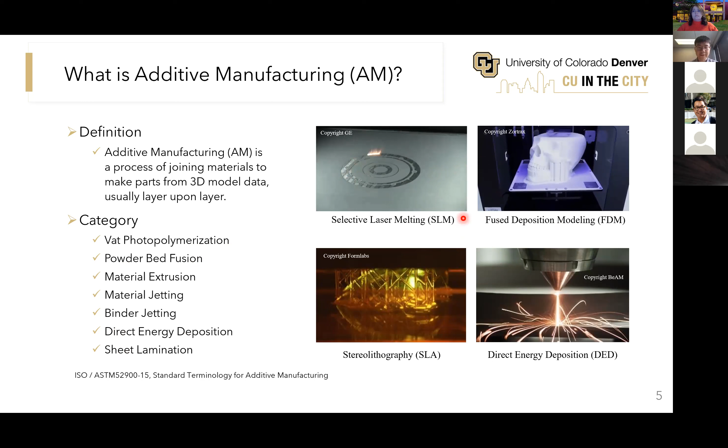So those are the most popular AM technologies. For sure, there are some others I don't have to introduce, but you can just watch on YouTube to see those technologies. Very easy. Okay, those are AM.

But what can AM bring us? Actually, there are a lot of capabilities of AM, and four of those are the most important ones. The first is called shape complexity. For shape complexity, it means that in AM we can make very complex parts, not just simple parts. We can make a very complex shape layer by layer, but for traditional manufacturing technology, we can only make standard or very simple shapes. For AM, we can make the complexity very high, which I will show you some examples of later.

The second is called hierarchical complexity, which means for AM we can make micro scale, meso scale, and macro scale. So in one part, we can have multiple scales, which means we can have hierarchical complexity.

For functional complexity, it means using AM we can make a part with different functions. For example, we can have mechanical function, fluid function, thermal function, or we can even have embedded electronics. So this means we can combine many functions in one part.

The last one is called material complexity. Usually for traditional manufacturing methods, we can only use one material, or we may use carbon fiber as a composite, using two materials. But for additive manufacturing, we can have a lot of material combinations, and we can call it digital materials, which means the material composition can be coded, and we can have functional graded materials. We can control the material distribution in each area, so we can have more material complexity for AM.

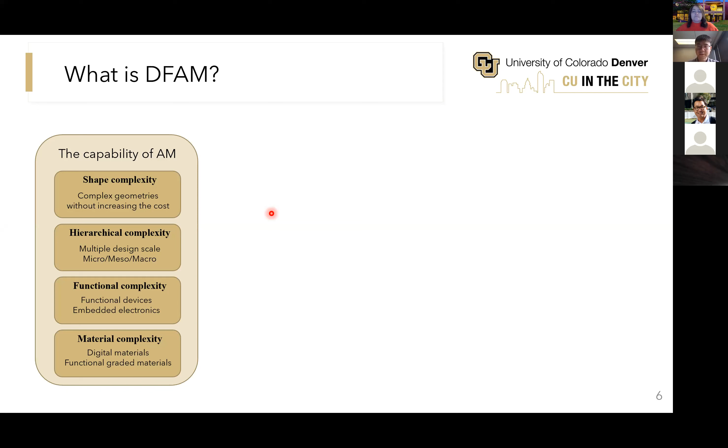After we know there are some capabilities of AM, we can have a product with many good functional performances, like mechanical performance with high stiffness or strength to weight ratio, high energy absorption rate, and good thermal properties like high heat transfer rate. We can also have biomedical applications, using biocompatible material and customization for biomedical purposes. We can also have meta materials, like negative Poisson's ratio or negative thermal expansion—unique properties that don't exist in common materials, but we can use meta materials to realize them.

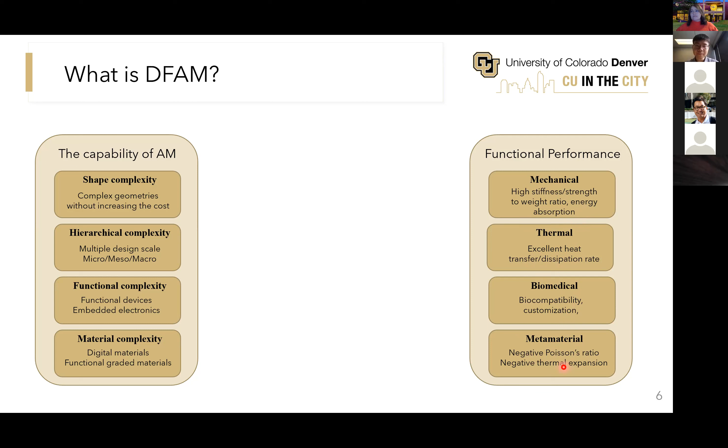So we have resources, we have our needs. How can we utilize the resources for our needs? We need a bridge—that bridge is design for additive manufacturing. That's what we're going to talk about today. Design for additive manufacturing means we have to consider the capabilities of AM and how we can use those capabilities to achieve functional performance.

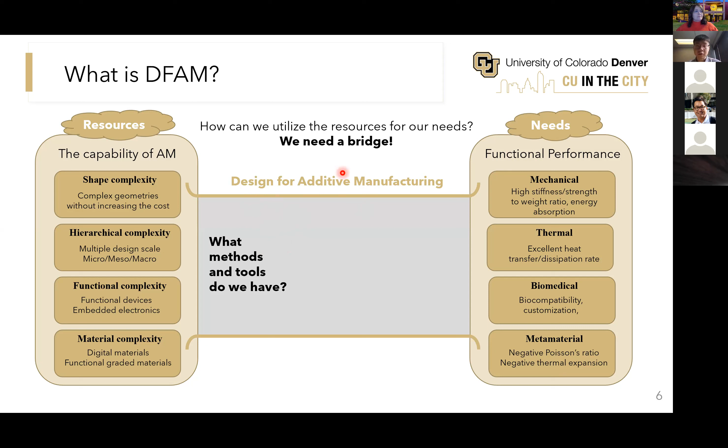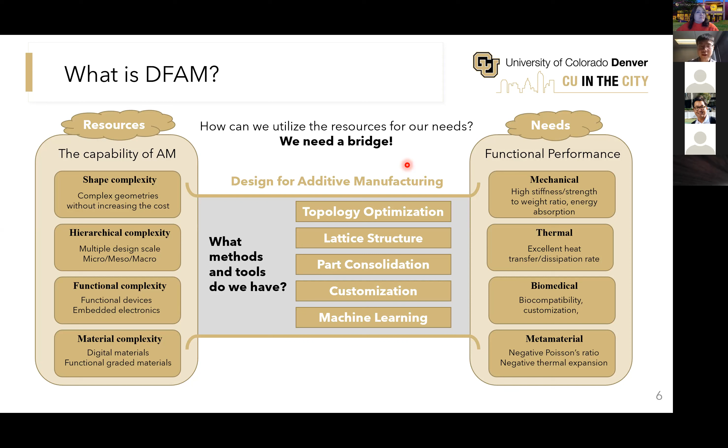For design for additive manufacturing, we have a lot of methods. What I'm going to cover today will include topology optimization, lattice structure, part consolidation, customization, and machine learning. There are many techniques in design for additive manufacturing, and those are the topics we're going to cover today.

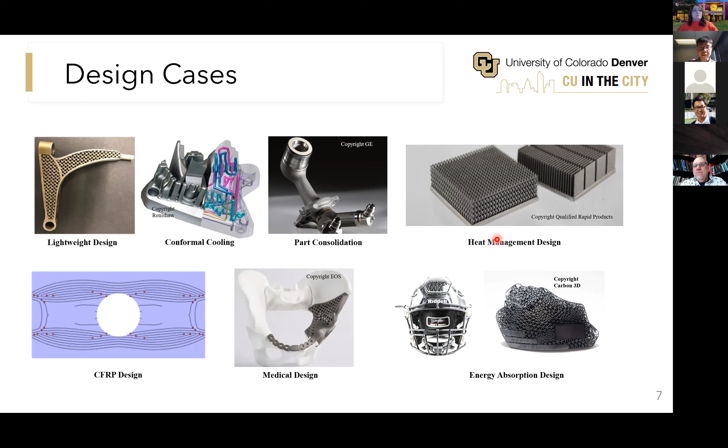So those are some design cases by AM, and I'm going to talk about methods to design those products today. If you're interested, you can also talk with me later. Now I'm going to move on to the second part—how to seize those opportunities. I will introduce the methods we use in design for additive manufacturing.

The first, and I think the most important one, is called topology optimization. This technology has been used a lot in additive manufacturing. Before I talk about topology optimization, I want to introduce structural optimization.

Before AM was developed, people mainly focused on size optimization and shape optimization for structures. Size optimization is easy to understand—we have the size of a plate or bar, and we just optimize the size. Shape optimization is more complex; we may optimize the shape of the plate or the bar.

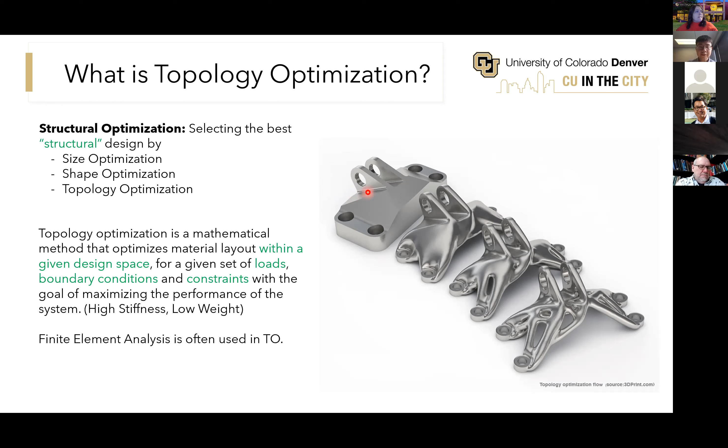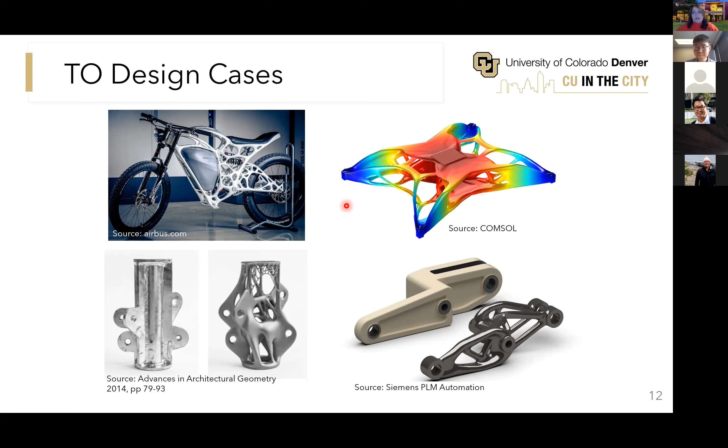Okay, and we have one more question. What are some examples of objective functions for topology optimization?

Can one use multiple criteria for optimization?

Good question. For topology optimization, usually the objective is to increase the stiffness. But we can have multiple objectives, which is called a multi-objective problem. Usually we use some weight ratio between each objective and add them together to have a total objective. Or we can have a coupled problem, like topology optimization coupled with fluid dynamics, and that will be more complex.

Like we have one model for mechanical and one model for fluids, and we have to interact with each other. So it will be a multidisciplinary coupled optimization problem. We can have an objective in one model and an objective in another model, and we have to optimize with a compromise between each other. We can have that, but the system will be more complex.

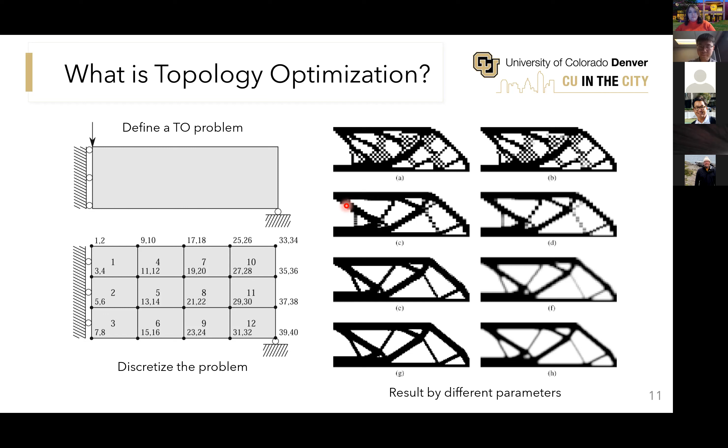Let's keep working on the next topic I'm going to introduce, which is lattice structure. Actually this is what I'm most familiar with, because lattice structure is my whole PhD research. So first, let me introduce what lattice structure is. It is a type of cellular structure with interconnected struts and nodes in a three-dimensional space. It is called lattice structure.

This word is from material science. In material science, lattice structure refers to a very micro scale or even nano scale. But for mechanical, we call lattice structure something in a meso scale or macro scale. So this is our lattice structure in mechanical.

For lattice structure, this idea is not new, but as I mentioned for topology optimization, as you can see, those structures are very complex. So only with AM can we make those parts. That's why lattice structure also got popular after AM was developed.

So lattice structure can be categorized by its periodicity or its homogeneity. We have periodic lattice, quasi-periodic lattice, or non-periodic lattice structure by its periodicity. And we can also have homogeneous lattice or heterogeneous lattice. The difference is that in the homogeneous lattice structure, the material distribution is uniform - all the strut thicknesses are the same.

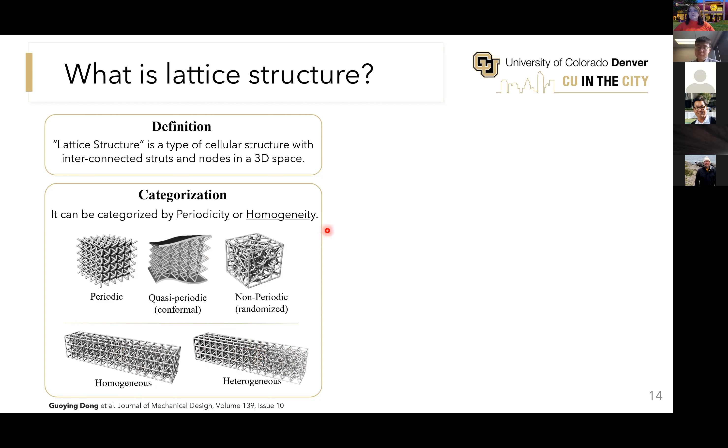So why is lattice structure popular? It is because it has many unique properties or very good mechanical properties, like high stiffness to weight ratio. It can also have a high surface to volume ratio for heat transfer or heat dissipation. We can also use lattice structure for high energy absorption because we have so many empty areas, the voids inside the structure, so it can absorb energy.

And we can also use lattice structure to make metamaterial. As you can see with this material, when we compress it, it will shrink on the other side, right? So we can call it a negative Poisson's ratio structure. Usually if we just compress something, it will expand in the lateral direction, but for this one, it will shrink in the lateral direction. So that is what we can use lattice structure for.

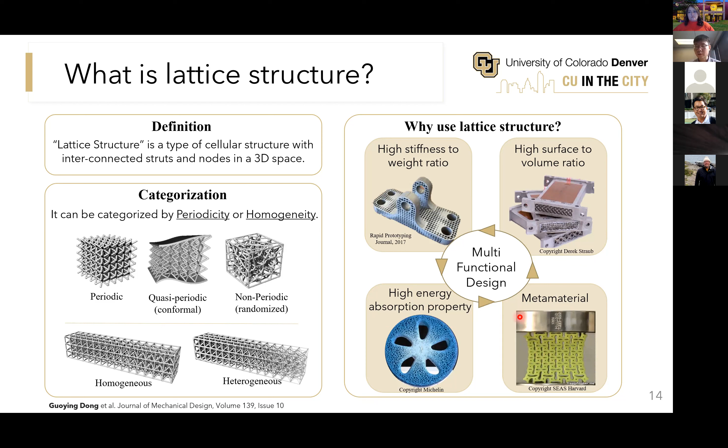So lattice structure is usually used to design lightweight structure, which requires its high stiffness to weight ratio property, like what we talked about with topology optimization before.

After we topology optimize one part, we may have some empty regions. For additive manufacturing, manufacturing this part is a little bit hard because we need some support structure here, and it's very hard to remove. So one idea is that we can put lattice structure in those regions, and then optimize the lattice structure together with this part. Then this is the part we need, and we don't need to remove the lattice structure - we can manufacture this part as a whole in the AM process. So this is lattice structure for lightweight design.

To optimize the lattice structure, usually we have two methods. The first one is called the BESO Method. In this method, we just model the lattice structure as a beam element. For each beam element, it has a thickness. So what we do is move the material from low stress struts - for those blue struts, they are low stress - and we move the material to the red struts where the stress is high.

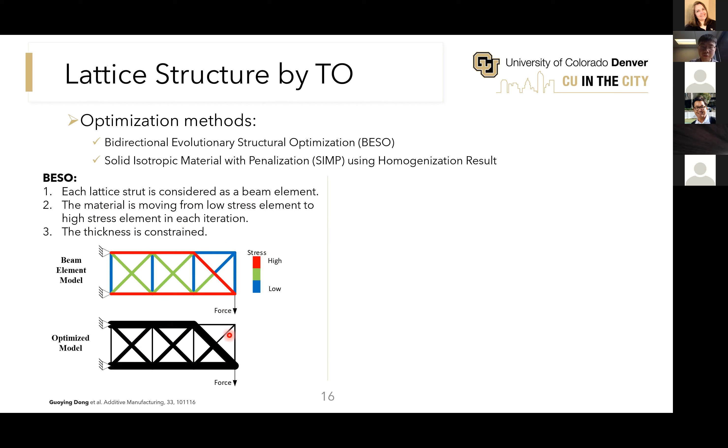So after several iterations, we can have a result like this. For those high stress struts, we have high thickness, which means we have more material here, and we have less material for those low stress struts. This is how the BESO method works.

Actually, the theory behind these two is more complex than what you saw here, but this is a basic introduction. If you are interested, you can go back and find some papers related to those methods.

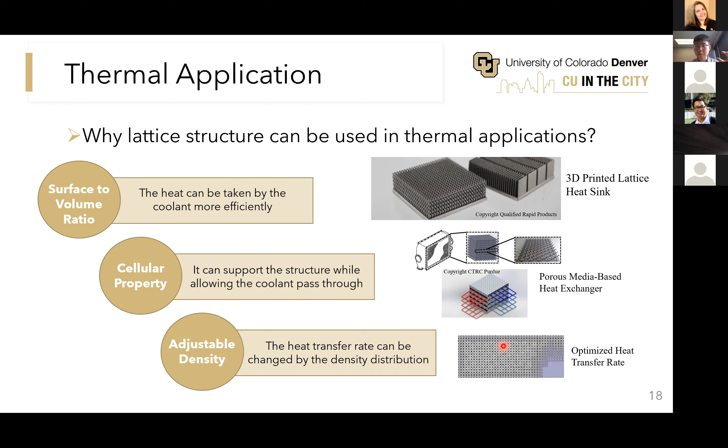Professor, one more question. Well, I can't promise that'll be the last one, but there's another one. What are the limitations of additive manufacturing? Limitations? Okay. Yeah, actually, there are a lot of limitations. Like first, for additive manufacturing, as I mentioned, for most of the process, it's very hard to make a big part. So you have to consider the size of the part.

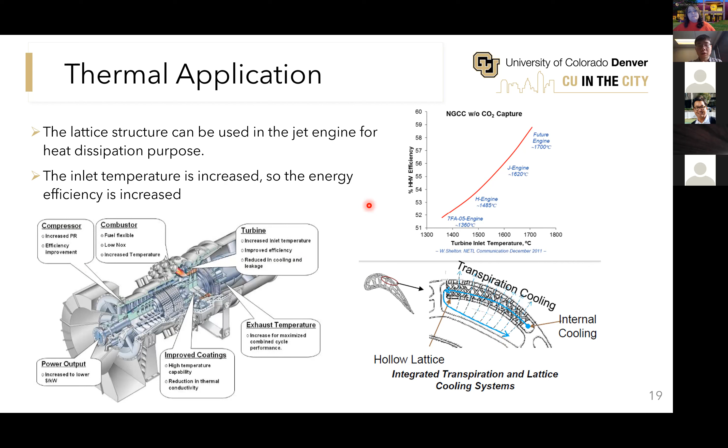And also for additive manufacturing, sometimes it needs support structure. Like if we want to manufacture this part without lattice structure, we need support inside. And we need post-processing. That is a very big limitation. Like for most additive manufacturing, for metallic parts, the surface roughness is very high. We cannot have a very good surface finishing. So usually we need to do post-processing by some machine so that we can polish it to have a very good part quality.

And also for additive manufacturing, there might be some material limitation. Like for the selective laser melting process, we can make stainless steel, we can make titanium, we can make aluminum, but not all. We only have some like 10 or 12 types of material that are used in the process. It is because people have to figure out the property of the material, and then they can have a very good process parameter for that material. So it takes time to develop. So still, there are some material limitations there.

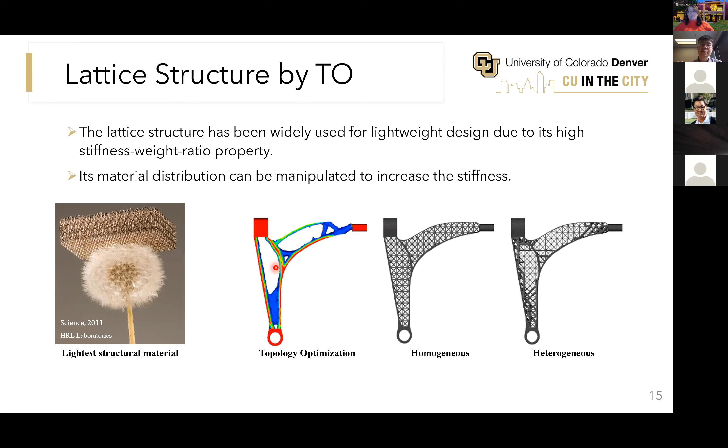Yeah, that's what I can think about now, but I'm sure there will be more limitations. So after you know better about additive manufacturing, you will know the limitations, and you can just consider those limitations in the design. That is also very important.

Okay, so after I introduce the thermal application, I'm going to introduce the energy absorption of lattice structure. So why can lattice structure be used for energy absorption? The first reason is that there are some little struts there. So when the strut breaks or when it buckles, it can reduce the maximum load here. So it won't have a surge load if we have impact. Here, as you can see, this threshold is related to injury. So if this pressure load is very high, then people may get injured. But lattice structure can reduce this peak value to make it lower than the injury threshold.

And the second reason is that the lattice structure's stress-strain curve usually has a plateau region. This is an ideal energy absorption material. It has a very long plateau stress region, so it can absorb energy. Usually we calculate the energy absorption by calculating the area under this stress-strain curve. So if this is long, then we can have more energy absorption. This is a real stress-strain curve of a lattice structure. As you can see, even though it is not purely flat, we still have a plateau region in this area. So those areas are the energy we have absorbed.

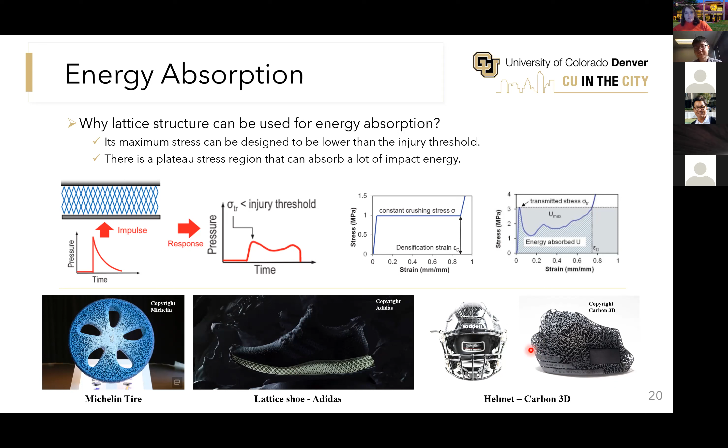Lattice structure has been used to make tires, to make the midsole of the shoe, and it can also be used to make helmets to absorb energy. And lattice structure has been used for shoes. That is a very successful production by AM. Adidas has used the lattice structure to design this shoe midsole. And why? Because first, as I mentioned, it has energy absorption, and it has air permeability so that the air can go through the lattice structure. It is lightweight. Usually for running shoes, we need lightweight, and it looks fashionable, so they can sell it at a very good price.

And this is some technology that is used to make the shoe sole, which is by Carbon 3D. For their 3D printer, the biggest advantage is that it can print very fast. They have a TED talk online from 2015. They can print something like this truss maybe in several minutes. They can just pull this truss out from their tank. This is really fast. That is good for production, for mass production, for consumer goods.

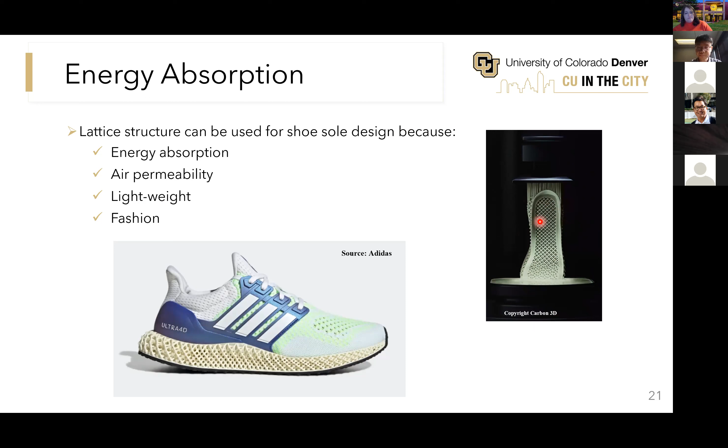Actually, in my lab, we can also design the truss with lattice structure. We developed our own code that can generate lattice structures. So usually to design such a lattice structure, we need a design space. This is our design space, and we take the top and bottom surfaces out, and we use these two surfaces as guide surfaces, and we can generate lattice between these two surfaces. Then we can have a lattice truss.

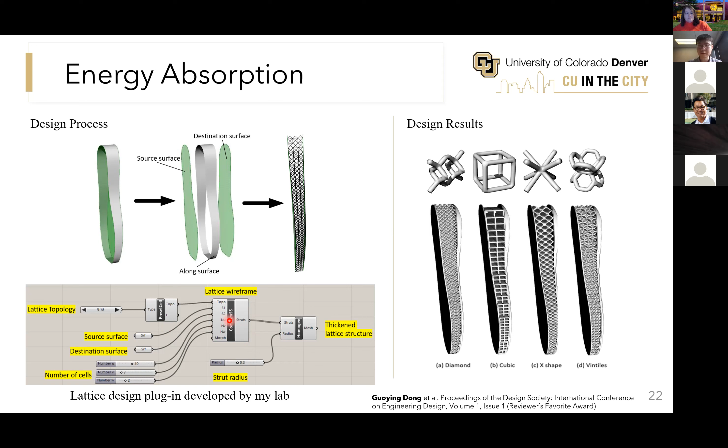Well, we can control the topology of the lattice structure so that we can have a different type of truss, as you can see here. And this plugin or this code is based on a software called Rhino. So if you want to make a fancy design, make computational design, Rhino and Grasshopper is a popular software I would recommend. So in order to introduce more about the software we have developed, these are some design examples.

We have those plugins. Those are actually the components here. And you can just drag the component here to generate the lattice frame. And you can also thicken the lattice frame to have different types of lattice. If you want to know more about this plugin, you can go to this website called IntraLattice Pro, which is what we developed before so that it can be used for lattice generation. Our plugin is free, but you may need to pay for the CAD software, which is called Rhino. You can go back to check it.

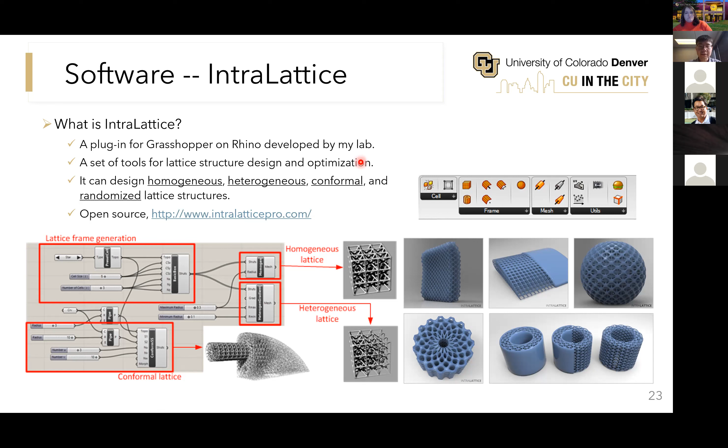These are some design cases we have, like for the shoe midsole, and we can also use this plugin to design bio implants with those cellular structures, or even teeth implants with those cellular materials. And we can also design the arm of this quadcopter. And we can also use it to design porous conformal cooling channels. This is very interesting. And we can also use it to design some customized parts. Okay, that's for lattice structure.

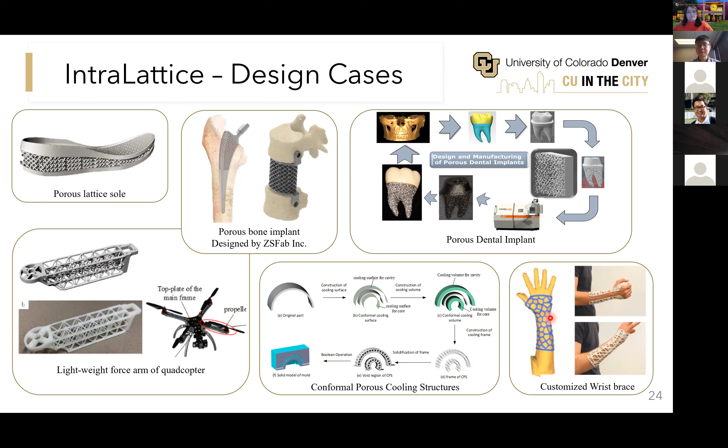And next, I'm going to move to the part consolidation part. Well, part consolidation is not my research area. I can only briefly introduce it, but I want to give the concept to you. This is also very important for AM. So what is part consolidation? It is a process in which multiple parts can be merged together. So for example, we may have multiple parts in this product, but with AM, we don't need that complex assembly. We can just make it as one part.

Well, for traditional manufacturing, we cannot make the internal structure, right? But for AM, it doesn't matter. We can make only one part. We combine all the parts together. There is a very famous application of part consolidation by GE. They combined the fuel nozzle from 20 parts to one part. And they mentioned that they reduced the total weight by 25%. And this part can be 5 times more durable. So this is a very successful case for part consolidation.

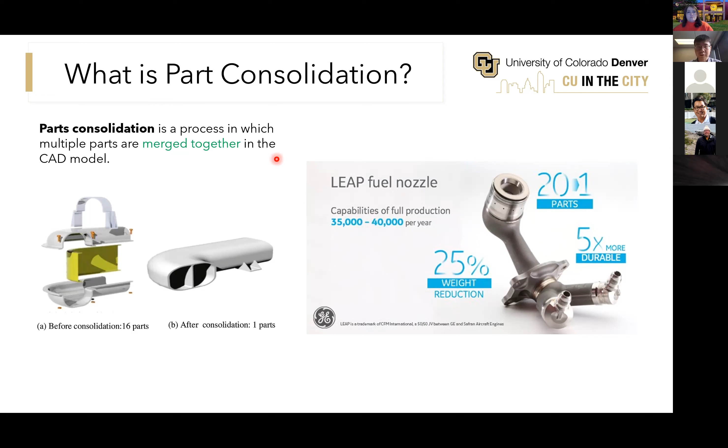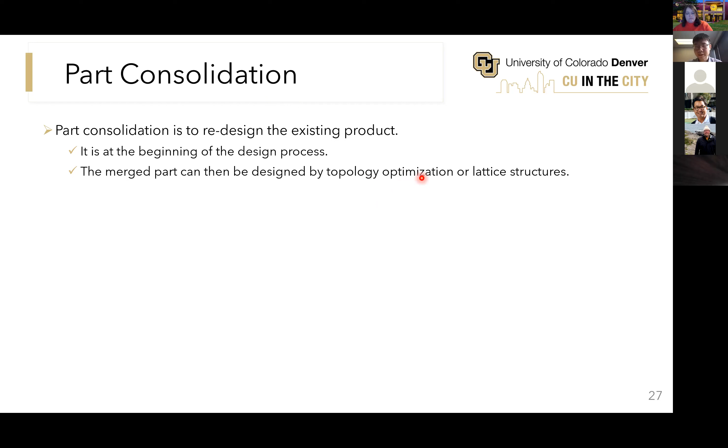So actually part consolidation is to redesign the existing product. The product layout will be totally different. So it must be at the beginning of the design process, which means part consolidation comes earlier than topology optimization or lattice structures. So this is the first step in our design. After we make part consolidation, we have a consolidated part, and then we can apply maybe topology optimization or lattice structure to further improve the performance of this part.

Well, there are some major impacts that we can achieve by part consolidation. It can reduce the time for assembly, so we can save labor work, right? And also it can reduce the parts we need to purchase, so it can reduce the risk in the supply chain. Especially in COVID, the supply chain was destroyed. So if we have fewer parts in our product, we can reduce the need for the supply chain and increase the safety of our part. And also we can reduce the labor work for assembly, which I mentioned.

I think the most important thing is that we can reduce the inspection and certification steps, and we can make the part more robust. That is very important because if we have more parts, the possibility to fail is higher. If one part fails, the whole product will fail. So if we have fewer parts, we can make the part more reliable. That is very important.

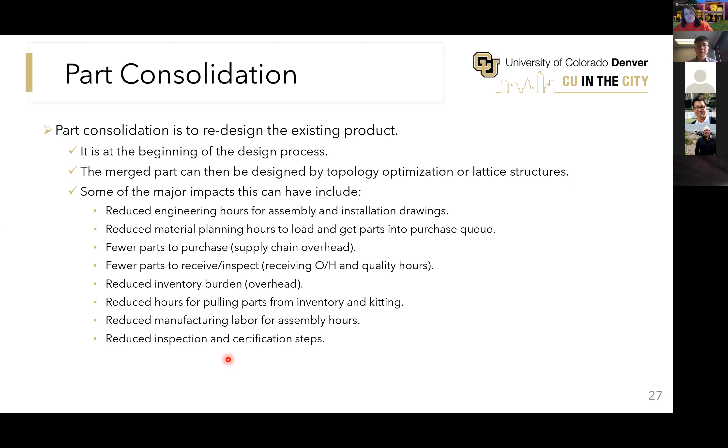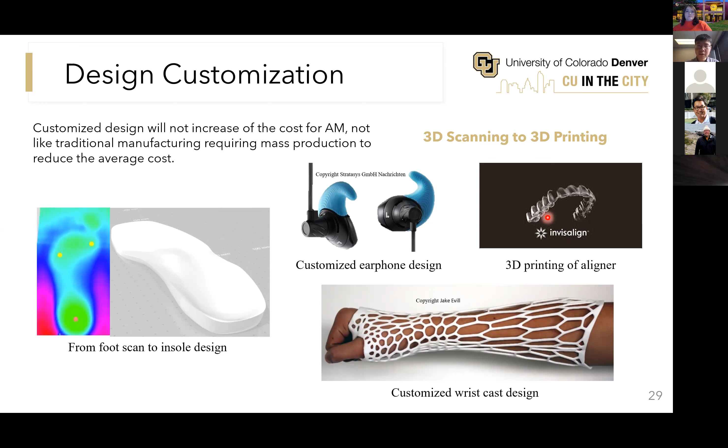So for customization, I think one of the big applications is for medical implants. People have used AM to make medical implants for a decade. And why is it so popular? It's because for each patient, their bone shape is different, so we have to redesign the implants every time. We can use AM to make the fabrication without the need to change the manufacturing process. But for traditional manufacturing, we have to design the manufacturing process case by case. Well, for AM, it's much easier. Only effort is in the design stage. After we design it, the additive manufacturing can directly make this part.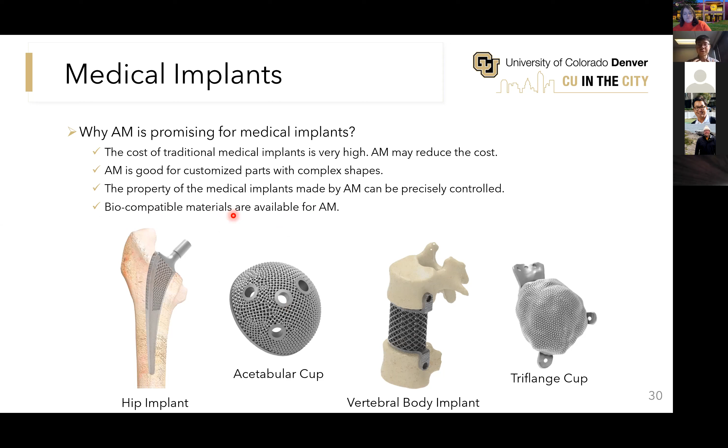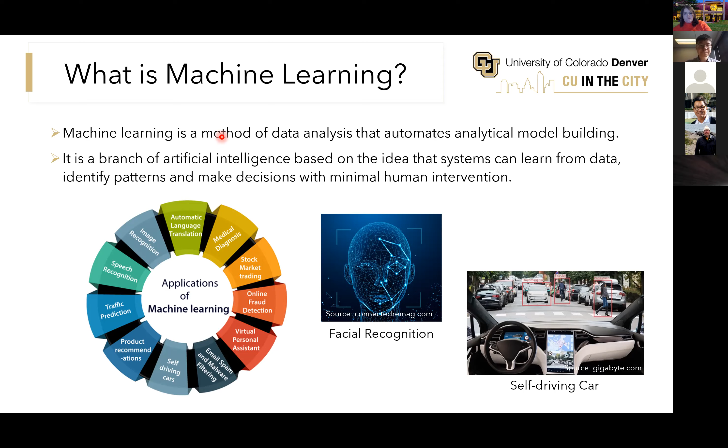Okay, so this is, I think, the last topic I'm going to introduce, the opportunities for additive manufacturing, which is machine learning. So we know that machine learning has been used in a lot of fields, right? Because machine learning is so powerful, it can be used in a lot of applications, like facial recognition, like self-driving cars. But basically, machine learning is a method to analyze data and make decisions or classifications. So for this kind of characteristic of machine learning, we can definitely use it in our AM. Actually, machine learning has a lot of applications in AM, but they are still in a very early stage, and I think this is a very good research direction we can pursue in the next few years.

So first, machine learning can be used in the AM process. It can monitor the powder spreading in the SLM process to see whether the powder is laid very well. If not, it can send a signal to stop the manufacturing to reduce waste. If we manufacture something that is wrongly manufactured, then it is a waste. So we can reduce the waste, and also we can detect the defects in the manufacturing process. For AM, one limitation is that it will have defects during fabrication, which will reduce the mechanical property of the part.

Well, we can put a camera in the manufacturing process, so that if there is a defect, it can detect it and send a signal whether we accept it or decline it. So that is how machine learning can help.

Because machine learning can be used in the AM process, it can monitor the process. It can also optimize the process parameters, like telling you which parameter is better during the process.

Machine learning can also be used for design, like topology optimization. People are starting to use machine learning to make topology optimization better, because if we choose different parameters, the result will be different, so machine learning can help us decide which parameter is better.

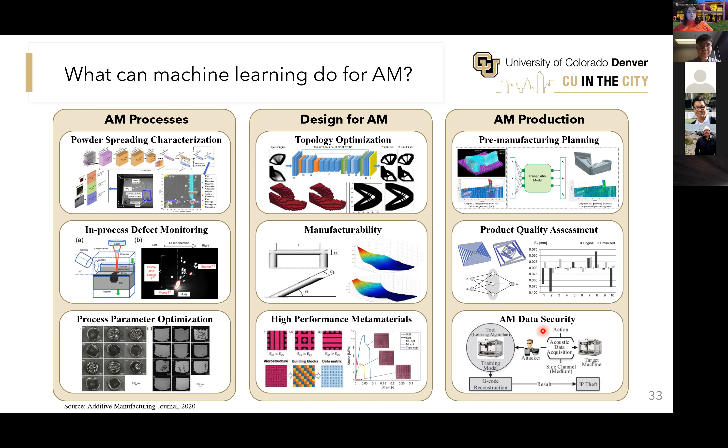So now I have introduced some opportunities for design for additive manufacturing, but we still have some challenges. In the last part, I will briefly introduce them: the first is design challenge, the second is simulation challenge, and the last is manufacturing challenge.

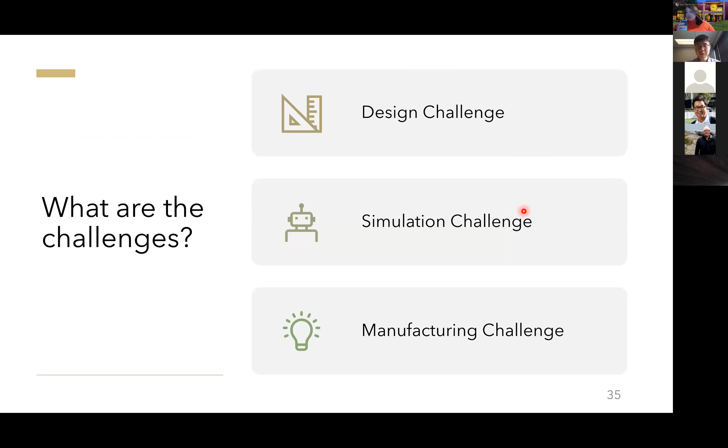For design challenge, usually our design is trying to get the optimal, right? But if we only consider design and not the manufacturing process, we can only get a local optimal instead of a global optimal, meaning we cannot take advantage of the full design freedom. So we have to consider design together with manufacturing, like the limitations and capabilities we have, in our design process to achieve a global optimal.

Also, current design is static design. It doesn't correspond to the variation of customers' needs, and it doesn't correspond to the variation of manufacturing resources. So those are things we need to consider in our design, making it a dynamic design so it can better serve the customer's needs and also consider the variation of manufacturing resources.

For example, when we use AM, we may have defects. So maybe we need to consider those defects in our design process, and we can have a better design to increase the safety factor. Otherwise, the part will break because of those defects if we don't consider them.

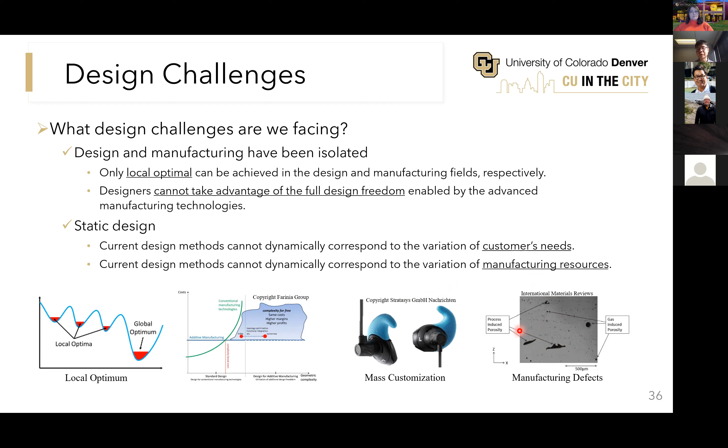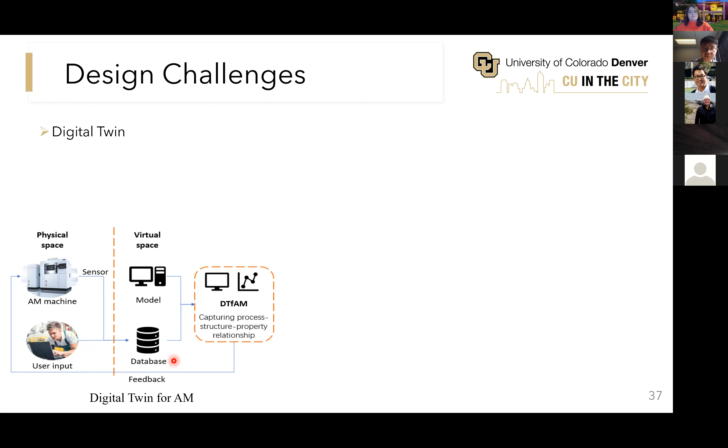So how can we consider the manufacturing process? Well, one popular technology now is called digital twin. You can consider digital twin as a high fidelity simulation model of the manufacturing process. If we have an AM machine, we can put sensors inside it and get data from the machine and from user input, then use models to analyze that data and put it into our design for additive manufacturing process.

What data do we need? We need the process-structure-property relationship. First, we have some process parameters, and they give us different microstructure, and we may get different properties. To know the property, we may need to go back to the process.

We can use a machine learning model to consider the relationship between data, then feed that data into our design for additive manufacturing system. Finally, we can have a data-driven design. Data-driven design means we gather a lot of data, and that data can help us in the design process to make the design better.

Previously, I introduced design methods that are more function-driven. For function-driven design, we know the function we need and we target that function to design our product. For data-driven design, we have a lot of data and use it to help our design. These two methods are not opposite; we can actually use them both together in the design process.

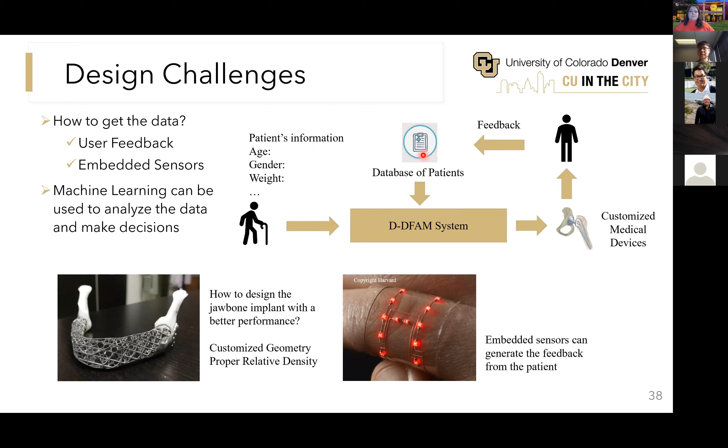We can also consider user feedback in our design. For example, we can have embedded sensors in the AM product, get feedback from the customer, and build a database for the patient. Then we can use this data-driven design method to consider that data and some patient information, leading to a better design. We can call this dynamic design. The design is not static currently; it will evolve with more data, and we can also use machine learning to help.

The next challenge is the simulation challenge. First, the structure for AM is usually complex, which increases the time for simulation. Also, our computational resources may limit our simulation capability if we want to design something, which can prevent us from doing the design. Not everyone has a supercomputer, right? So what we need to do is reduce the computational resources needed.

Someone asked about optimization for the lattice structure. Usually we use the homogenization method to reduce simulation cost in lattice structures, but as its name suggests, homogenization is for homogeneous material. For lattice structures, it's actually a heterogeneous lattice, so whether we can use the homogenization method here is still questionable. Even though some papers have been published, they didn't address the accuracy here, so we need to figure it out.

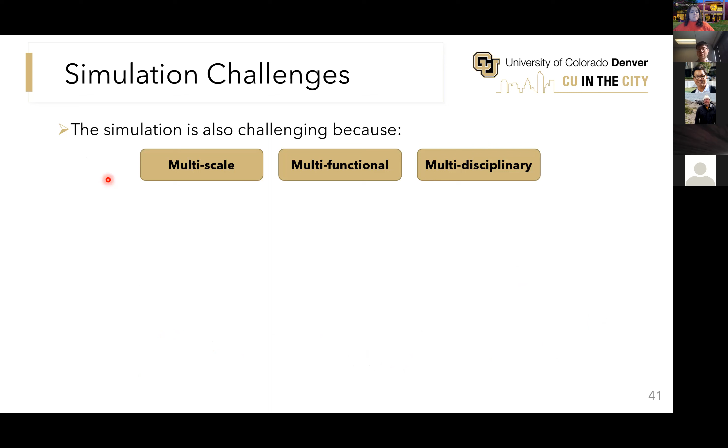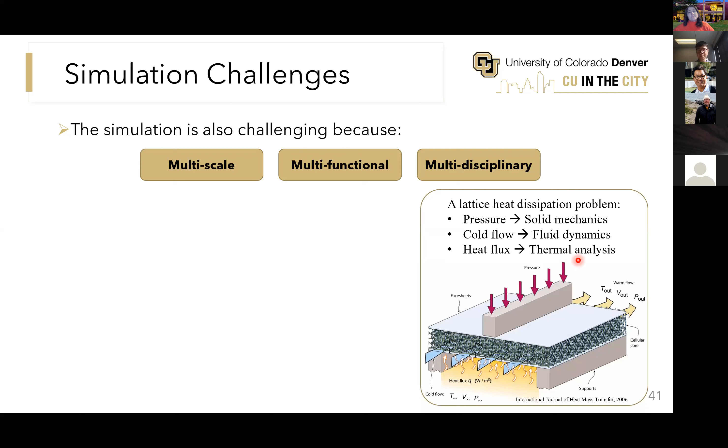We may also have multifunctional and multidisciplinary aspects in our simulation. For example, with a lattice structure under pressure on top, we need to figure out the solid mechanics, consider the cold flow which is fluid dynamics, and account for heat flux going through it, which requires thermal analysis. It's quite complex, so what we need is a multidisciplinary design optimization algorithm.

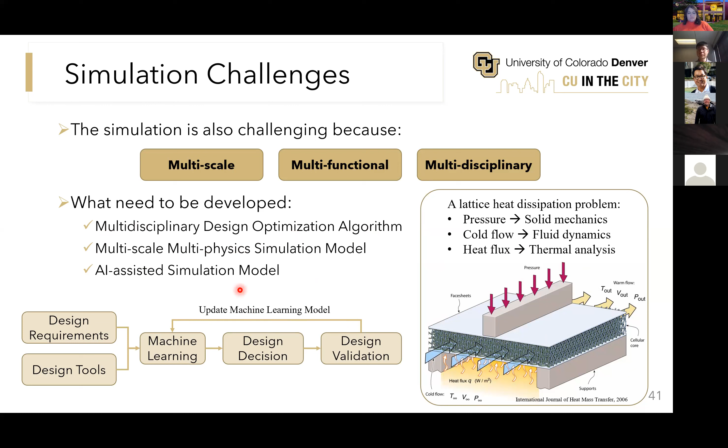Some people ask whether we can have multiple objectives for topology optimization. This can be a topology optimization problem where we have multi-physics, so we need a multidisciplinary model to deal with it. This is also very challenging.

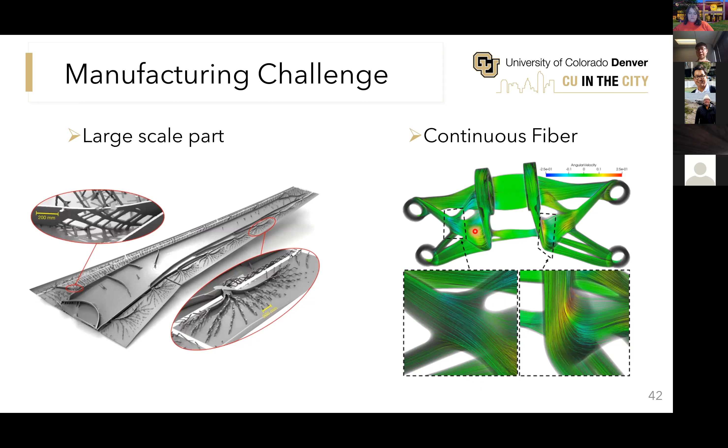The last part is the manufacturing challenge. We may have a very large part with a very complex shape, like this wing structure, and we may want continuous fiber in our design to increase stiffness. Currently we have some large-scale AM, like this one, where we can use the DED process to print a very large part in a space. But how to increase the accuracy of printing when our space is larger, that is a challenge.

And also for this automated fiber placement, we can place the fiber as what we want. But how to make it in a 3D space, how we place the fiber in 3D, is still very challenging. I think that's all I want to present today for the seminar. If you have questions, you can ask me, and we can discuss.

Thank you so much, Professor Dong. It was a very interesting presentation. Let me ask you, from the end of your work, if you could solve one hard problem in the next 3 years, would it be ML applied to some topology optimization, or what would it be? What one hard problem would you like to work on?

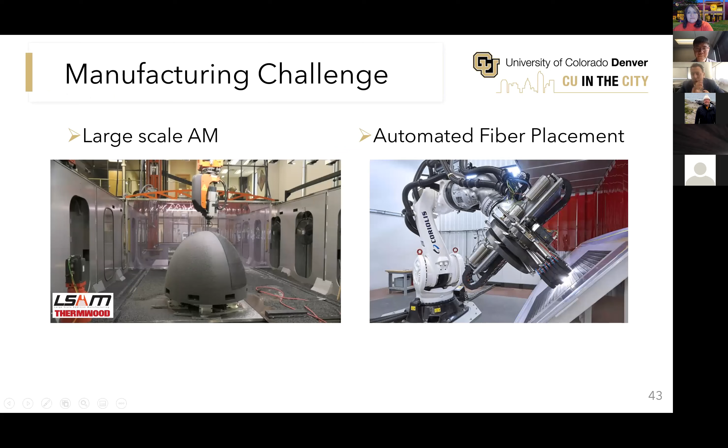Okay, so in the next 3 years, what I'm going to work on is the simulation challenge, because most of my background is simulation, so this is what I'm most familiar with. What I'm trying to do is build an intelligent simulation model that can deal with complex parts, for example different material combinations, different material distributions, and different structures. So how can we use machine learning and multi-scale simulation to increase accuracy while reducing computational cost? That is what I want to do in the next few years.

Excellent. Farnoosh has a kind of related question. It might be a fishing question, which is, which of the review challenges are explored in your lab or in other ME labs and teams? Sorry, can you repeat your question? I didn't get your question. It's in the chat, from Farnoosh. Okay, let me check the chat.

Yes, and if Farnoosh you're still on, you could ask it. Okay, hey, hi Doug, thank you so much for the talk. This was very fascinating. My question was very related to what Doug asked earlier. I think you answered part of the question, but maybe the more general side of this. The question was which of these challenges you reviewed are you particularly pursuing, and maybe you can speak to what ME has been focused on. Okay, thank you, that's a good question.

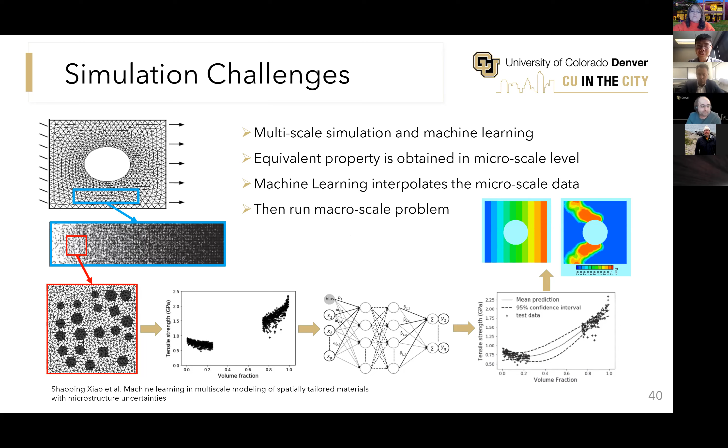Actually, my plan is to first tackle this simulation challenge, because simulation is fundamental for design. Usually we use computational design methods, and simulation is very important and very challenging. I also know that many people are working on digital twin things, like how they can monitor the manufacturing process, get the data from there, and build a digital twin for the physical model. Then they use this digital twin in their design or simulation. That one is more related to the manufacturing process. Some people, maybe not in mechanical but also in material science, deal with the process-structure-property relationship, investigating the relationship between them so that when we know the process parameter, we can know the property. This is also very important, and I know many people are working on it.

I appreciate it, thank you very much. Thank you. Do we have any other questions for Dr. Deng? If not, sorry, oh please go ahead, last minute question, Brian. Okay, I have a question. Are you still working on voxel printing for digitized material?

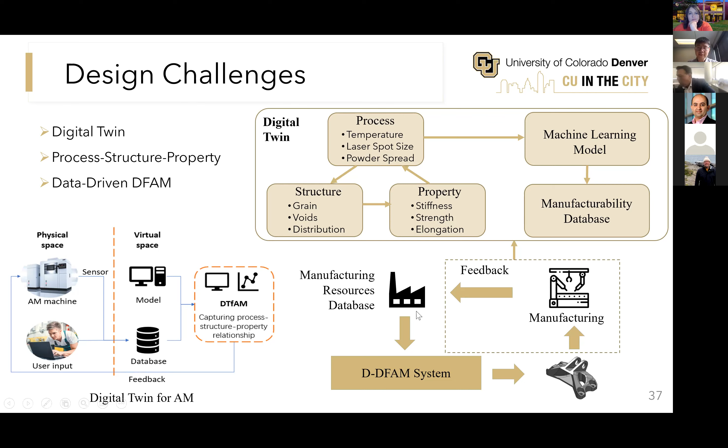Yes, I have worked on some voxel printing before, and we have a voxel printing printer on the medical campus. I have talked with them to see how we can use voxel printing to make some fancy designs. I think one problem for voxel printing is how we convert the data. You have an idea in your mind, and how we can use data to represent what you want to design. Maybe we need to write some code to enable the transfer from the design to printing. That's what I'm going to do maybe in the next few years.

Awesome, thank you, thank you. Any other questions? Well, first I'll just say I really enjoyed the presentation, and I think everyone else did. I've seen all kinds of nice comments, so congrats on a great lecture. I look forward to seeing your work develop over the next few years. Thank you all for joining, and Tammy, thank you.